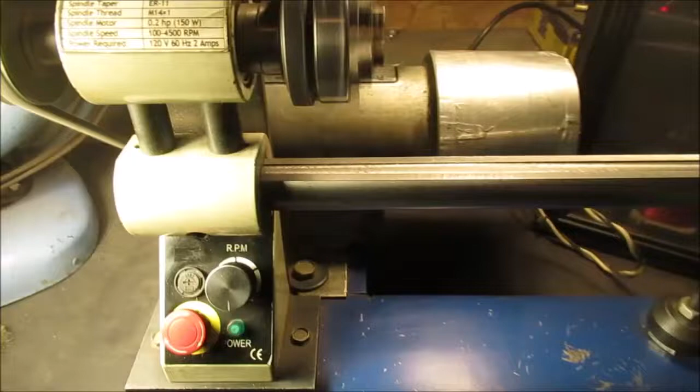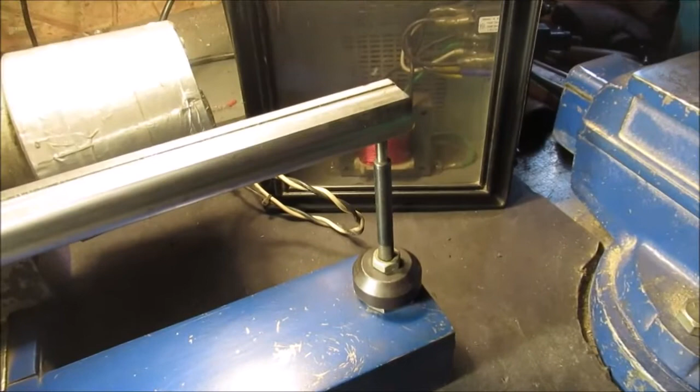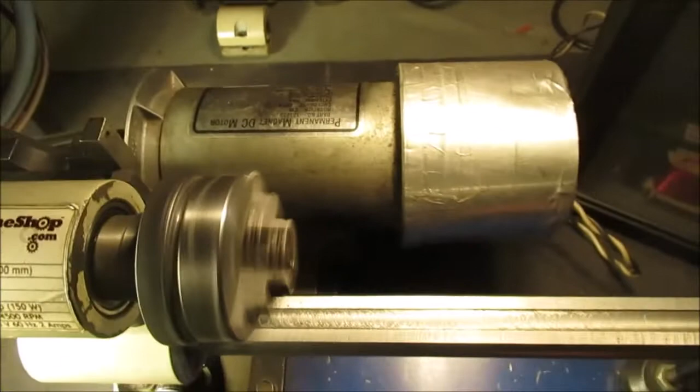How many people remember the nano lathe? Well, there's a part broke, so I'll have a video on fixing that broken part. I have to manufacture a part there, but we're just getting this out, making sure it runs. I'll leave you a couple of pictures if I can find them. I found one of the inside of this controller that's in this box. I can't remember the number on it, it's a popular one, like MC60 or whatever. In the end of the day, it was one of the most popular controllers to get for the treadmill motor. This is a big, like 1-horse motor back there. This is a fan housing I made for it with a computer fan, it had an external fan blade on it. We'll wind it out here once for you.

This thing runs at a very high speed. It's running faster than when I first got it going. It's been sitting, this thing's been set for a long time.

If you can hear me over the power tools, I always do that, talk over it. It's going to be kind of a little mix there.

We're going to get out our little grinder thing in the router control, and we're going to show you whether we can grind aluminum, because we're making a part out of aluminum. So that'll be the part I'm making for this, but I'm going to include it in the Sunday in the Shop video, me doing a little bit of work on that, just playing around with that grinder, a 1/4 inch grinder with a router speed control. So stay tuned.

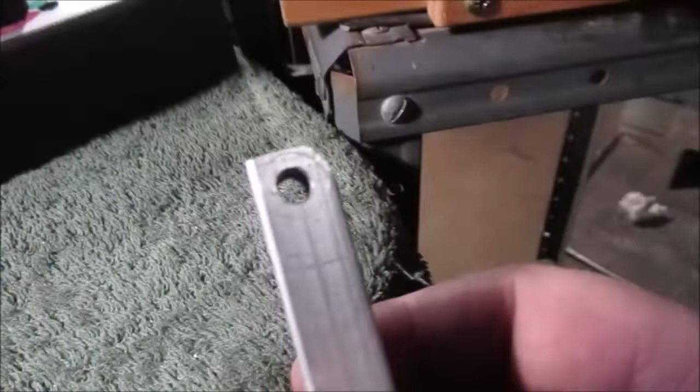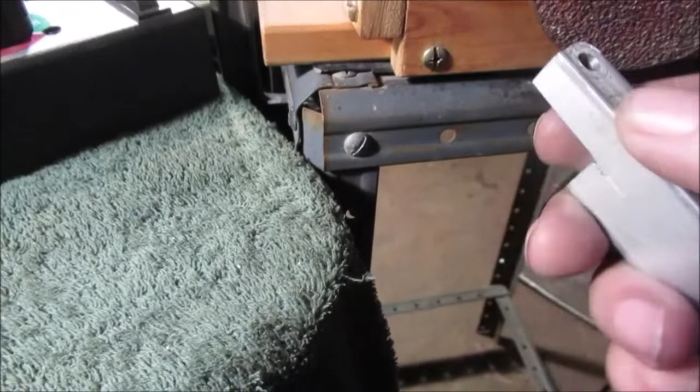Okay, this is a fail. I can't get it, I need something that's more precise. I don't know if you can see that circle, it's going to be smaller than that circle. So we're off to the belt disc sander, we're going to get it out. This is just too coarse, and it's just not accurate enough with that rough coarse blade to do what I want.

You'll find out what this part is if you watch the video on repairing the nano lathe, but we just want to show some different techniques of how we're going to try to smooth this aluminum. So stay tuned, off to the next machine.

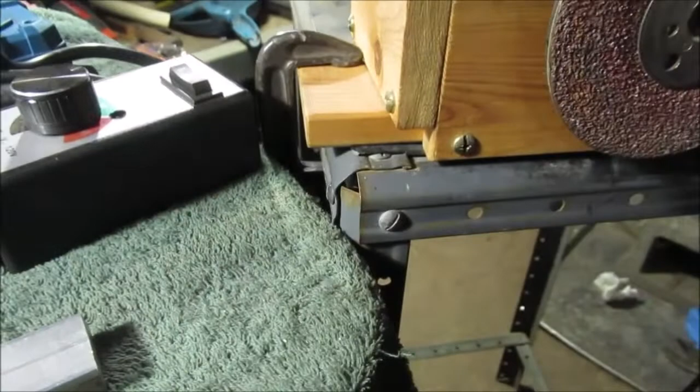Okay, we are starved for lighting. We vowed to get better lighting in here this year. We have a lamp, see that? LED bulb right above this thing. That's how dark it is, and it's even light outside.

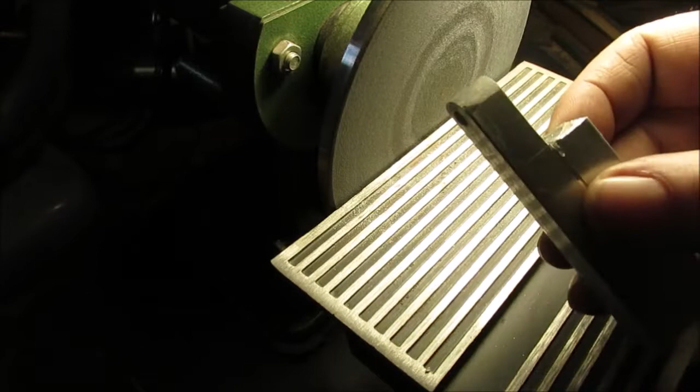Okay, this piece is going to have to be this diameter, about 5/16 diameter when it's done. So we're doing as much as we can beforehand. And it's only going to be not even a 1/2 inch long, but we left it on this stock so we have something to work with, like a handle, you know what I mean? Then we'll cut it off when we get down to working size.

We'll run it one time so you can see how, I do not know the grit of this, but it's the only pads I have for this sander. We did take the belt off, see where the belt's gone? We don't need to hear that running around, so I thought I'd throw that in there too. Just take the belt off if you don't need it, it's a lot quieter.

This thing will be almost all the way around, there'll be a piece of metal coming off it. So you'll see that in the video when I'm actually finishing this part.

A little bit more accurate, huh? It says it's hard to get this way. Remember, this wheel goes up, if you try this it can throw you, see where it wants to float? You really shouldn't work on that side, this side's pulling it down to the table because it's turning this direction.

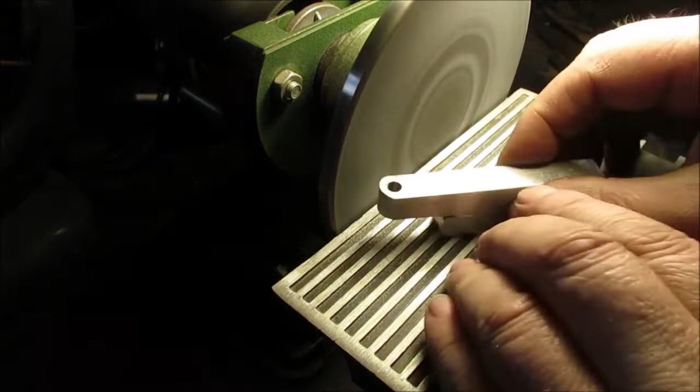This just keeps it kind of even. I said that's why I kept this all together, so when I do this part of shaping this, I figured that grinder wouldn't work. The 4.5 inch grinder is too rough. I want to take the rough, I just want to rough grind it to get it down here a ways.

Now that is hot. I got my pan of water down here. That is hot, and I don't know if this is wet, dry sandpaper.

So you gotta watch your fingers too, see that? You're trying to get in like this. I mean, you probably wouldn't take your finger off, but hitting it here is better than over here sucking it in, but safety first. And yes, I'm wearing goggles, this powder flies.

Jump off the table. Okay, enough of that. We'll take you over to the bench so you can see what it looks like so far, how good a job that's doing. So I can't tell you what the grit is.

Here's another good reason I bought these calipers for metric. That's right at 6mm. There's 5, one more of these go. These are 0.02.

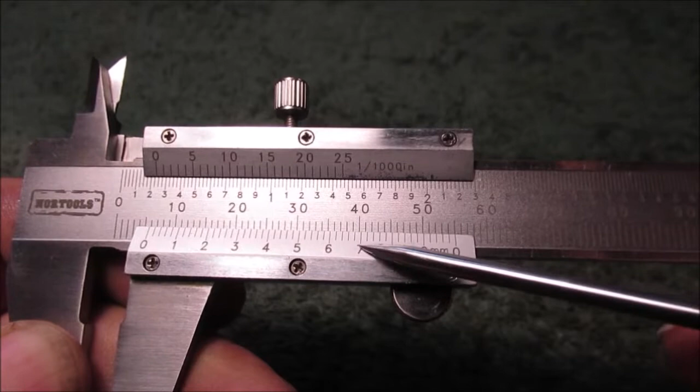If you want to learn how to read a vernier metric caliper, type it in YouTube. You'll find a kind of cartoonish stick figure, blue background, white line. He's got a little doggy beside him. It's one of the best ones I found for how to read one of these. It's probably the first one that'll pop up, because believe me, there's a lot of stuff on YouTube that isn't that accurate.

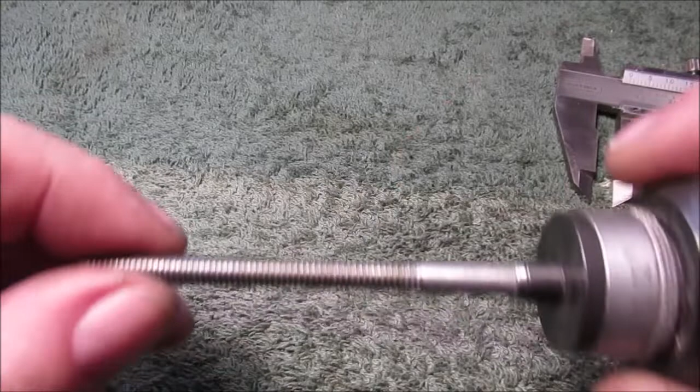This is the screw that goes out of the lathe, the part that makes it go back and forth. It's not in and out, it's when you're lathing down a rod. You'll see in the video, I'll explain it, and how I made that cut.

Wow, that showed up good. Excuse my grungy hands. I made a tap out of this. This is a left-handed thread.

And I threaded this. I had to have a little bit of a clearance hole to get started. So on one of these sides, this side, the threads aren't that good. So when I use this piece, I'll probably start it this way.

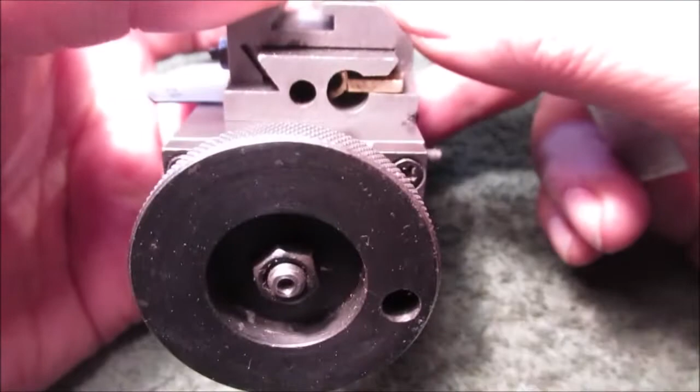And the piece, if I can find it here, this is the piece that broke. See it in there? That's all, and that's 5/16.

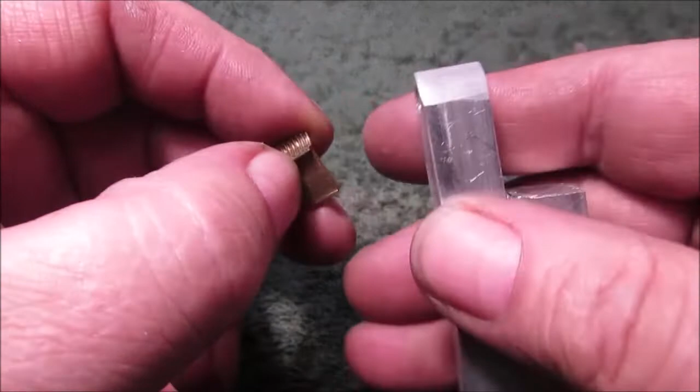It can be bigger than this. This is only like not even a quarter inch. So it has to be made like this, but I'm going to get away with making this part wider. This will be narrower, of course. And it can be 5/16.

Here, let's take it off there. See this part that goes in and out. This part goes this way. Yeah, this is where it goes back and forth with the screw in it.

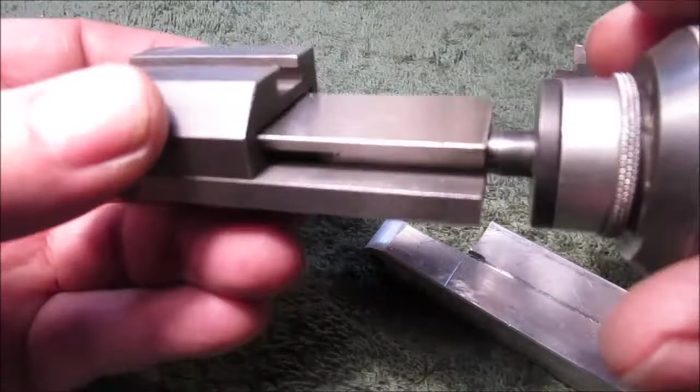You can get really confused. And there's a little set screw that holds this in here. I'll explain that in the video. It holds this, and then here's where you can zero it.

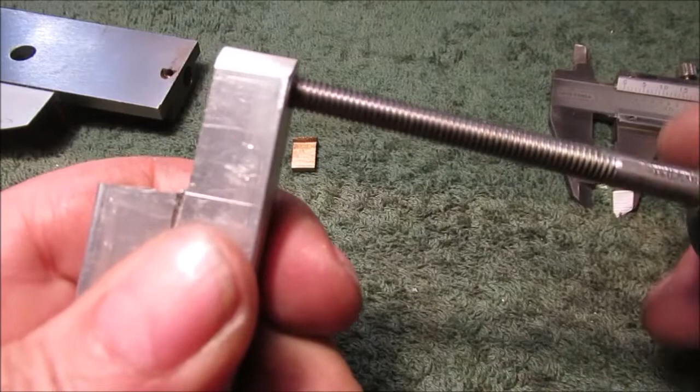Anyway, one of these ways, you watch me, I'm turning left. I'll have it the other way. I'll have it where I cut in the middle or thread it.

I can't believe I threaded it an inch long in aluminum. You should never really tap that long. And I had the vice grips on it, small vice grips, because it doesn't matter how bad I chew this. This is nothing, it can stay there forever. I'm not even going to clean that up.

Was this, or try to find a machinist that can make that part, left-handed thread, 6mm, and I don't know the pitch, because metric is a totally different kind of pitch. You got to buy a pitch gauge for it.

So if you're interested in this, there'll be a video coming out soon if it's a success. So if you never see the video, you know I gave up. I'm not giving up though.

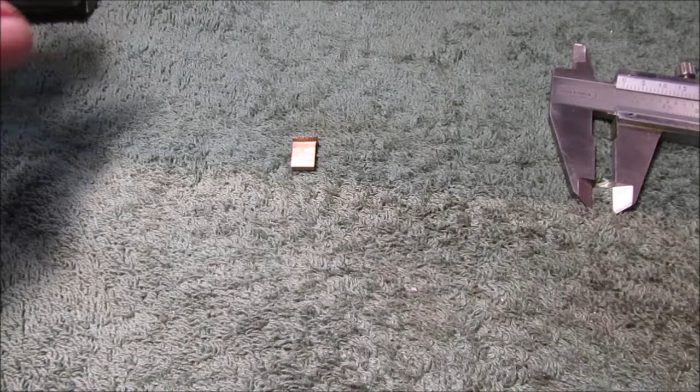Back to showing how good the sander worked, then we'll go on to a different subject. So I'm starved for content. The weather's finally getting nice, it's like 55 degrees out, the sun's shining. It's only like 10 in the morning.

That circle came from the drill chuck coming down where I bottomed out the bit. So see that circle? And I was going to show that. I'm looking around here for my drill bit, which I cannot find. Let me pause for a second.

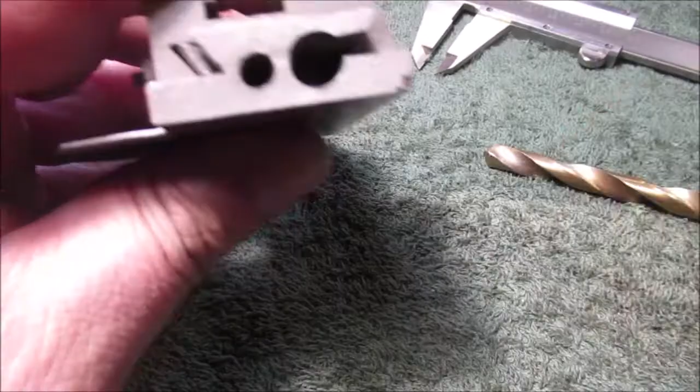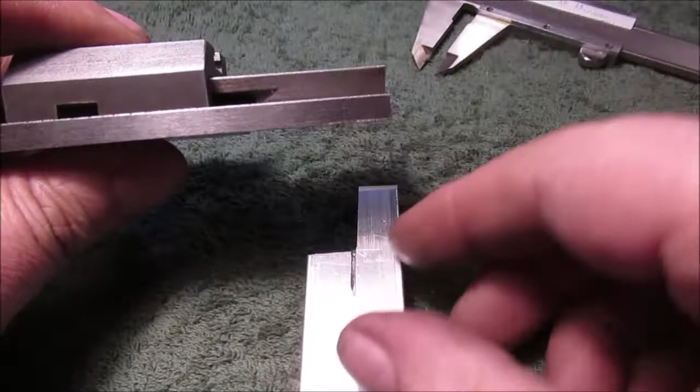Okay, I'm even going to include this in one of the parts of it. See, it could be this big. The thing is, when you come down here, see where that is, like that? It will go inside there. I might have said in the video I didn't think it would if this was wider. Like this, yes, it will go in that hole.

Because you have to, when you get clear out here, you don't want nothing to hit. So I'll adjust that accordingly. If anything, at least it'll be wider this way. So I want more threads than that.

This is really cheap stuff. It was cracked, I knew it was cracked. I got the lathe out—that's one reason I did that drill jig. I got the lathe out and it was all gummy, and I tried spraying it and got a little carried away, and it just cracked. It shattered, there were 3 other pieces of this. It just shattered, it's just junk.

Anyway, off to a different topic. I didn't know if I showed how smooth that was, so if I did, sorry, I'm repeating myself.

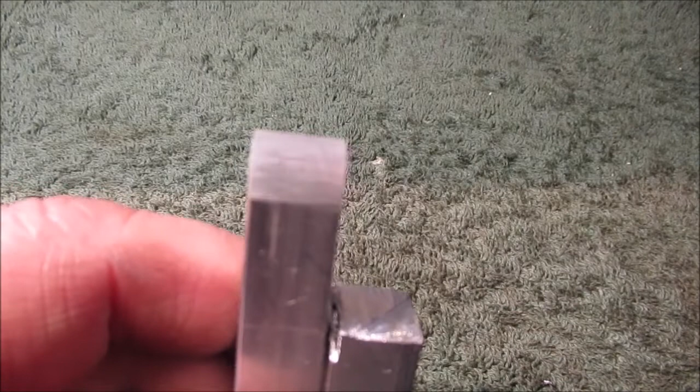How good that did. I'd like to find a package of the sanding discs, or check somewhere on my shelf, to see what grit these were. Stay tuned for further video.

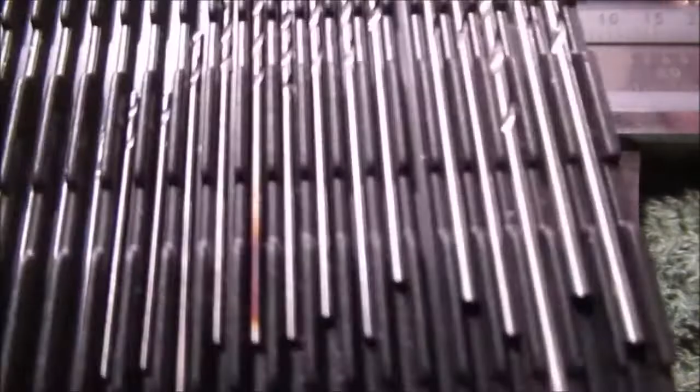Okay, gotta keep something in focus here. Another good use for this - you sneeze, you're gonna lose these drill bits. See the numbers? Okay, we pulled out the 1mm bit.

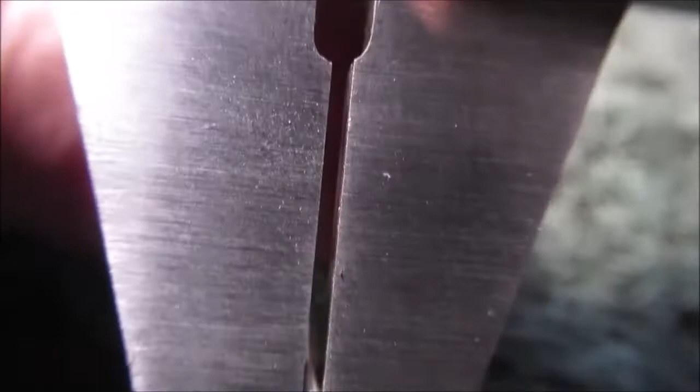We are so close to the camera, we're hitting the lens. I'm not kidding you, we'll hit the lens. See that? We bumped the lens of the camera.

Boy, it's close to 1mm, enough for me. The carburetor of my tractor is surging, okay? It has a Lifan motor, Greyhound before the Predator, so it was the blue one. I'll give you a little history. I don't know if it's exactly the same as a Honda carburetor.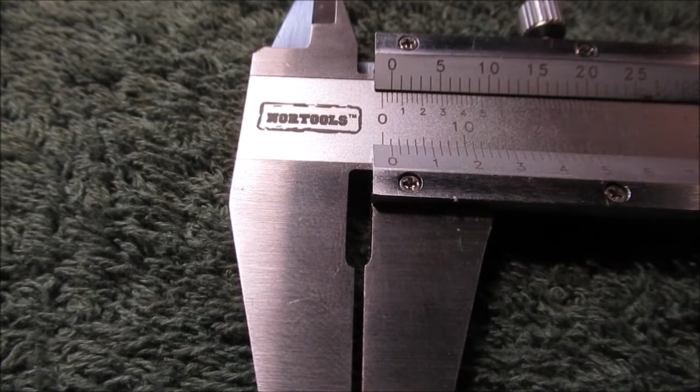On the Honda, you can take out the screw that you adjust your idle speed with, then pull this little plug up and pull the low speed jet out, okay? Then you can make it a little bit bigger. I've had that engine since 2011, had it for 8 years. I've never adjusted the valves on it, but I've listened to the valves.

I bought these some time back. Let me show you up close the sizes. I have measured a 0.5mm, and it seems to measure pretty darn close.

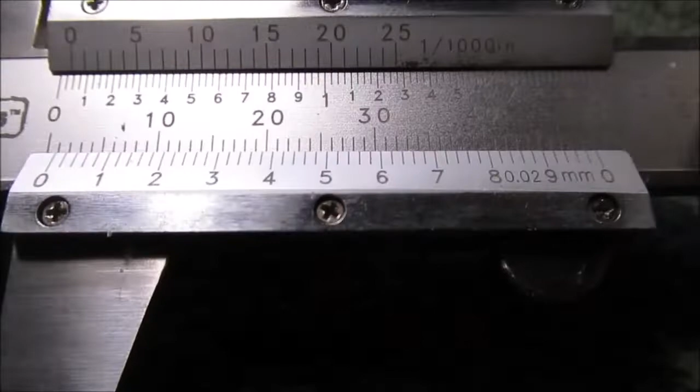Like I said, I'm still learning how to read these because they go by 2s - 2, 4, 6, 8, 10. It even says on here, see where it says 0.02. This is very hard to read, I need to get a magnifier. It's very hard to read the thousandth scale up here. That's 0 to 25 thousandths.

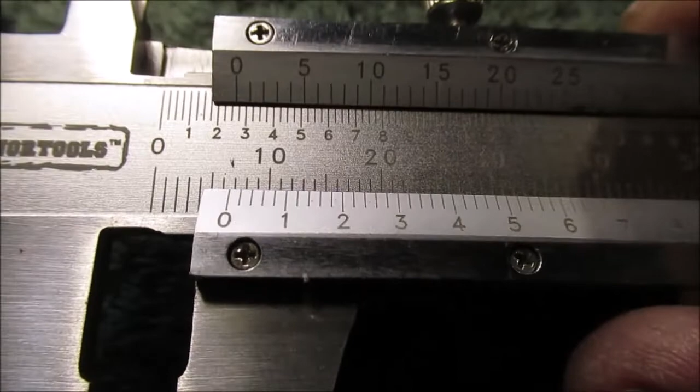I did explain that in the video when you line this up, the best I could on camera. I can read it, I've done it before so I'm used to it. I just never did metric, and I'm glad I watched the video. It goes by 0.02, these lines.

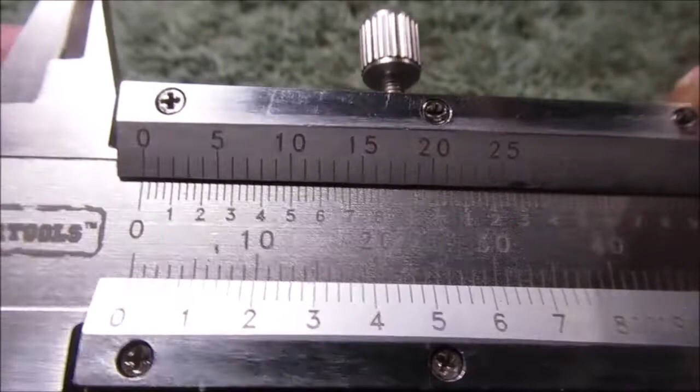Anyway, I cleaned these up. Took some 1000 grit sandpaper, a little bit left of this plating because they had smeared up on here. I don't want to take anything rougher, so once in a while when I get bored, I'll sand a little more.

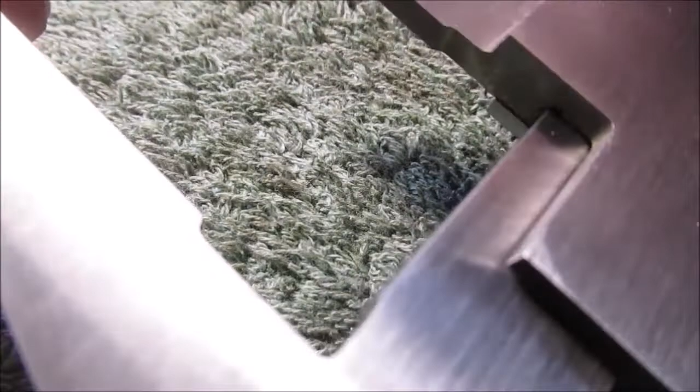I took them all apart because there's a burr in here, back on the piece somewhere, I filed it out. I put my chain lube stuff on it, has Teflon in it, looks like a white clear looking stuff. You have a copper brass shim under here where these screws go against - one has a hole so it locates it, and then this one presses down on it, and it's wavy shaped. So when you tighten it, it acts like a wavy spring.

So they're very smooth now, because I want these tight. I don't want them real loose where you bump them and it moves. I don't want to just be doing something and bump it accidentally. So it takes a little bit of thumb pressure to move it.

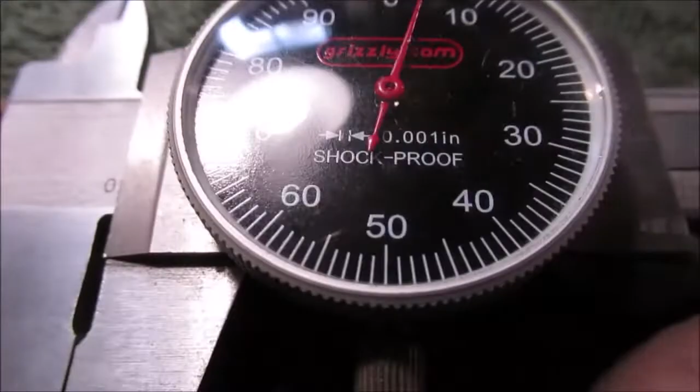Okay, we beat that to death, everybody's probably tired of that. Don't buy a set of these unless you want to educate yourself, because you might as well start out with a cheap dial set. I do not like the battery ones. I had the cheap Harbor Freight ones, that's probably why. But try to start yourself out with something like this.

I see these aren't zeroing. See that?

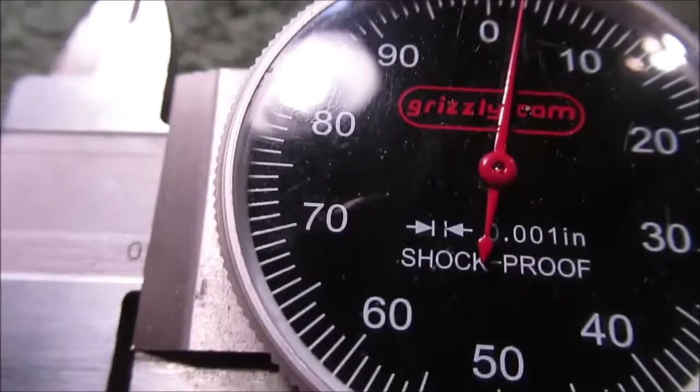So we'll think of another subject before we go today, that's going to be another topic. Why did that go off zero when I haven't dropped them? That's a mystery, huh? They're junk.

The little gears in these things, they're not that great. And it's the same quality as when you buy the one at Harbor Freight.

The only difference is the dial. They look almost the exact same, made the same. So I didn't really get anything super quality.

So someday we might be showing you taking this apart and getting this set back on zero. I know how to do it, but it's very tedious. I'm glad I got a small screwdriver set, because you got to do a lot of disassembly on this thing. And I'm not just going to turn the dial to get it corrected. So stay tuned, we'll find something else before we go today.

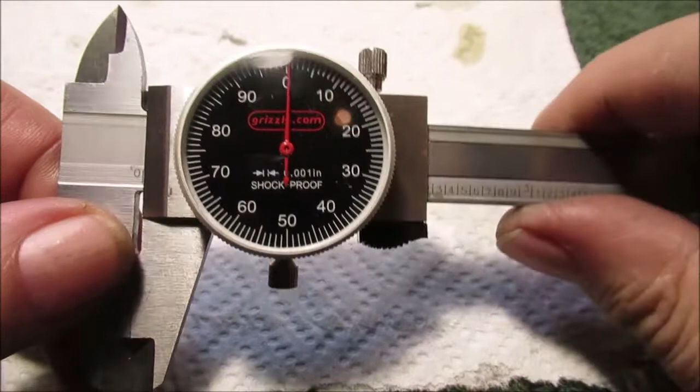Okay, I got mad and took these things apart. I'll insert a couple pictures here at the end so you can see what it looked like. I'm not going to make a video on how to do these.

They're still catching. I cleaned out the rack, see the little teeth? I cleaned the teeth off. There's two of them, took a picture of this mechanism. There's double teeth on there. I even cleaned them using a sewing needle, digging into the grooves.

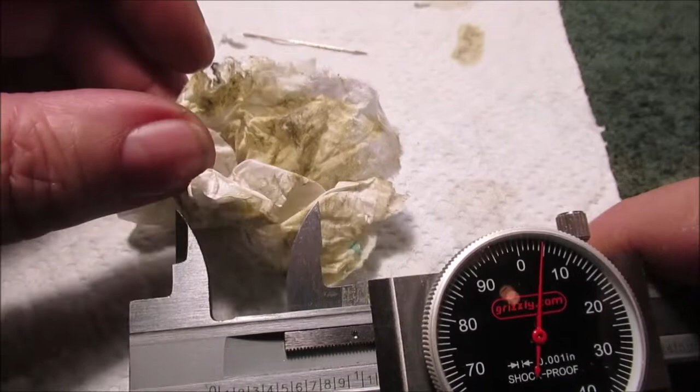Look at the dirt and grime that came out of there. I got these and they were junk. I sprayed them and it was really gritty. Look at the junk that was in there. That yellow grease is factory stuff, because I sprayed something else in there besides anything that would have been yellow.

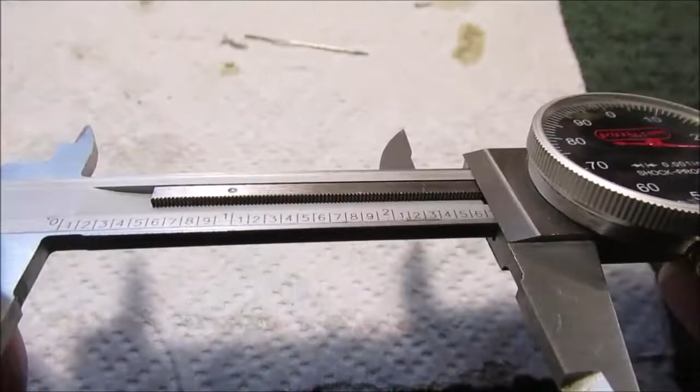They're even better out here. I think the rack is getting shot in there, because they're better out here. Watch it bind when I go up here. See how it doesn't hit zero exactly every time?

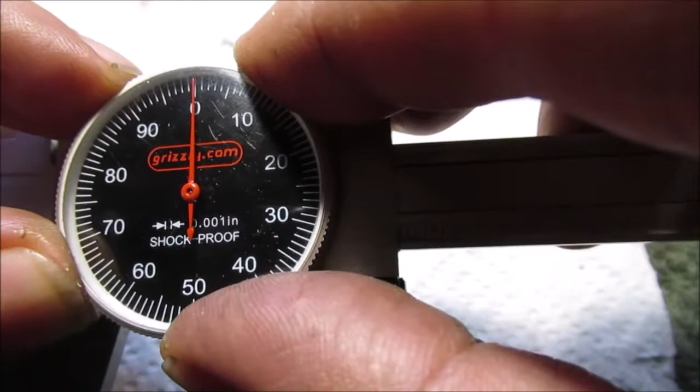What you do is you loosen this up, then you turn your dial back and forth, and you tighten this up. So they can be off a little bit.

You hear that? Did you see that? They're junk.

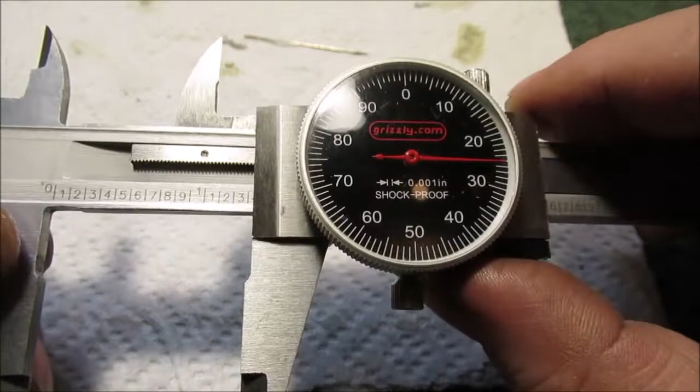I clean these teeth, I clean them and clean them, and I clean the other ones. And I looked at them. I don't have a magnifying glass, but just by looking at them, they're wearing out. They're not as sharp as they used to be.

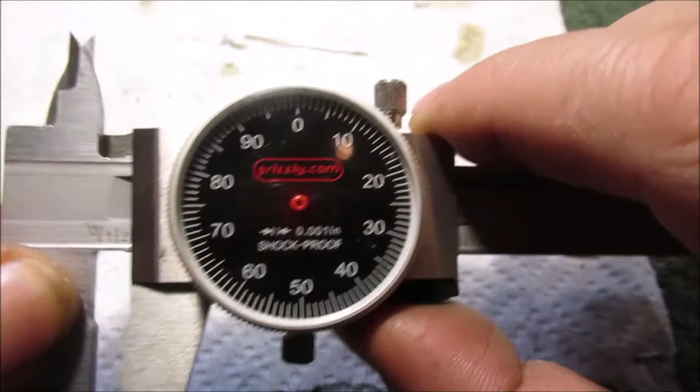I don't know how many years I've had them.

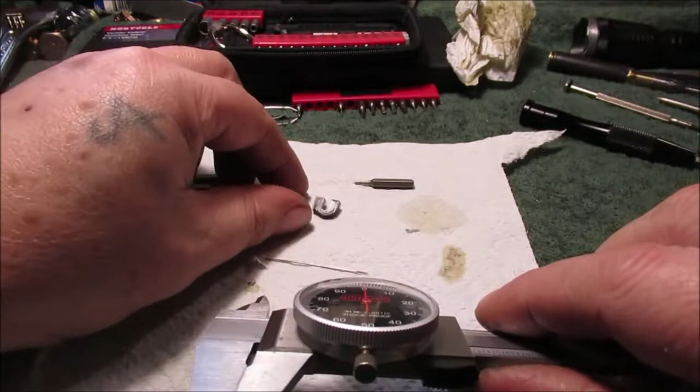I deleted this, I chopped this right off of there. See that? I'm tired of this stupid roller, I don't like it, it's hard to roll. I'd rather just take my thumb and go like this.

See, I'd rather just put my thumb in there and pull back and forth, because I keep these screws just at the right tension. There's a little spring thing in there, I don't know if I took a picture of that. It's just a flat strip of copper brass stuff, and the screws tighten down. It goes down on here and takes the slop out of everything.

There's a video, if I could find it I'd put it in my description, if you really wanted to see a guy tear these apart. He did it on an expensive set, and that's where I learned how they come apart. So I remember that much in my mind. Be careful what he did to take it apart.

You gotta pry this off, you gotta take that needle off. I used the pocket knife blade real carefully. Then you take the dial off, and then you got the mechanism where you take the screws out.

If you look real close, I don't think you can see it, but you can just see the heads of the screws in here. You gotta take the dial and everything off to get all this mechanism off. Then this plate right here is hooked to this rod, that plate comes off. Also this metal plate, this plate right in here, that comes off of it.